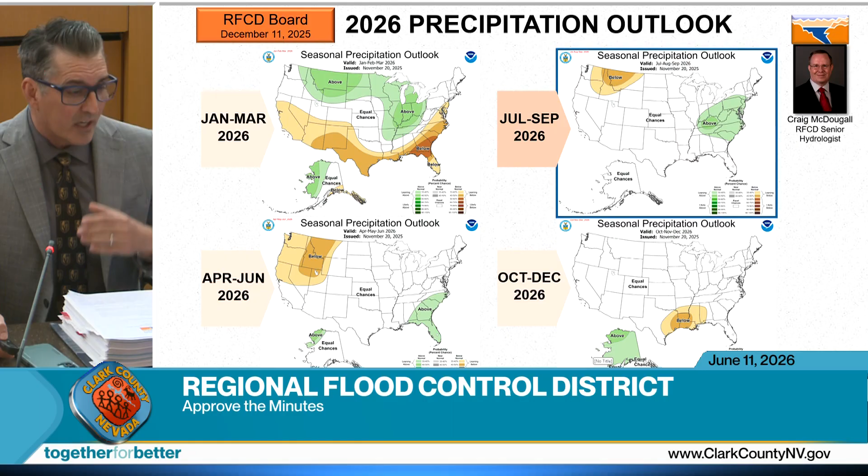But the updated forecast for this flash flood season looks like it's going to be wetter than drier. More above normal precipitation is expected. Pushing that out further, the August through October projection shows even more of southern Nevada likely wetter than normal. So we're looking forward to some rain this summer. Hopefully we don't get it all in one storm or one hour, but we could certainly use some rain.

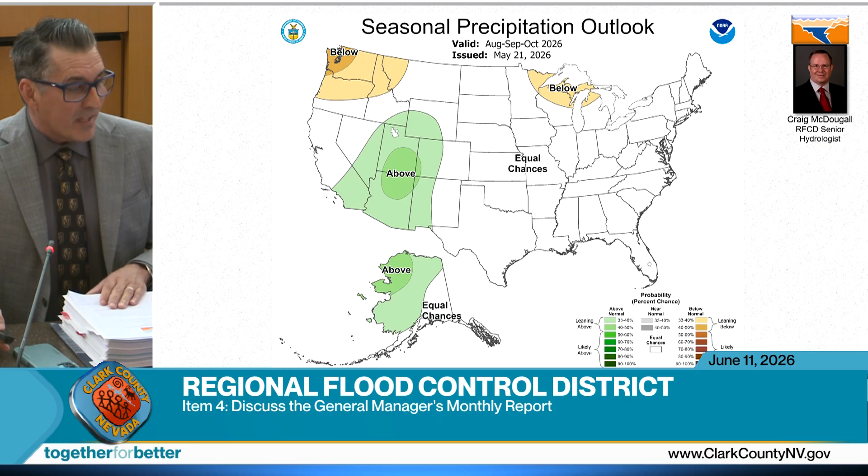Last but not least, I'd like to support the home team, say go Knights go, big game tonight. Hopefully they'll take care of business. With that, happy to answer any questions. Any comments or questions? Seeing none, we'll move on. Thank you, Mr. Trelease.

Part 2 of the agenda is the consent agenda. Items 5 through 22 are considered by the Regional Flood Control District to be routine and may be acted upon in one motion. Note that item 14 has been deleted from the agenda. I'll entertain a motion. Move to approve items 5 through 22. There's a motion on the floor. All those in favor? Aye. Any opposed? Motion carries.

Item number 23 is action to approve the master plan amendment for Avenue G storm drain, City of Boulder City. This is a public hearing. We do have a presentation provided for this project.

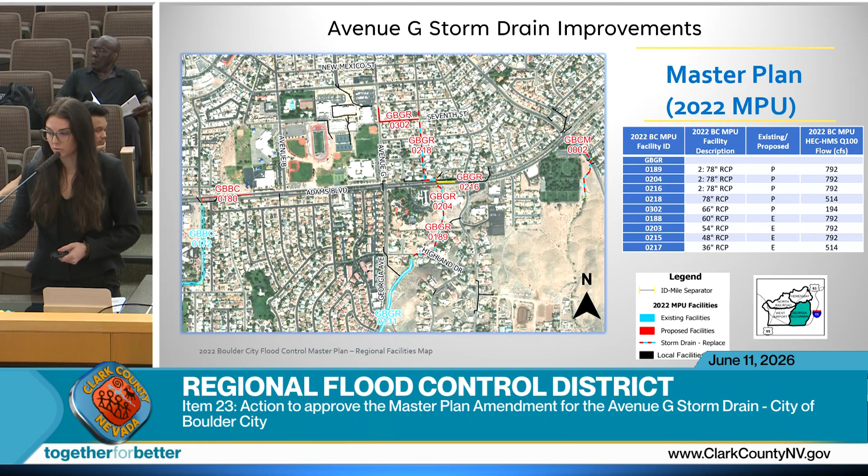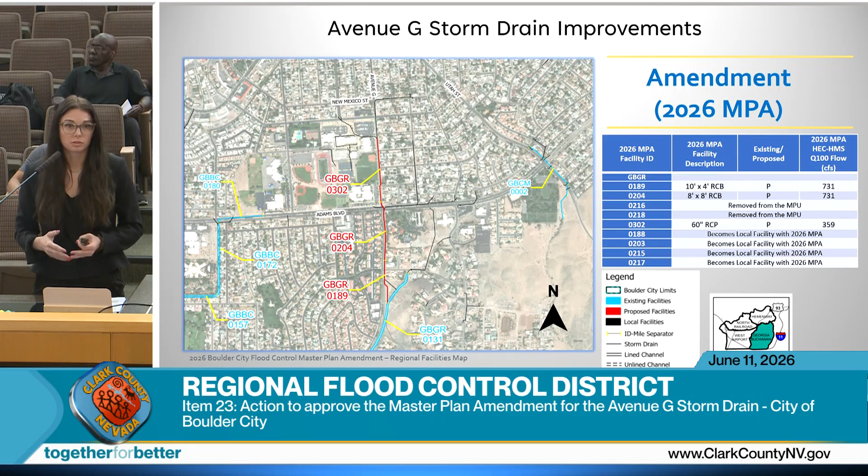The proposed alignment moved everything to Avenue G in front of Boulder City High School, and it was much cleaner in terms of construction clearances, and sizing as well was much better hydraulically.

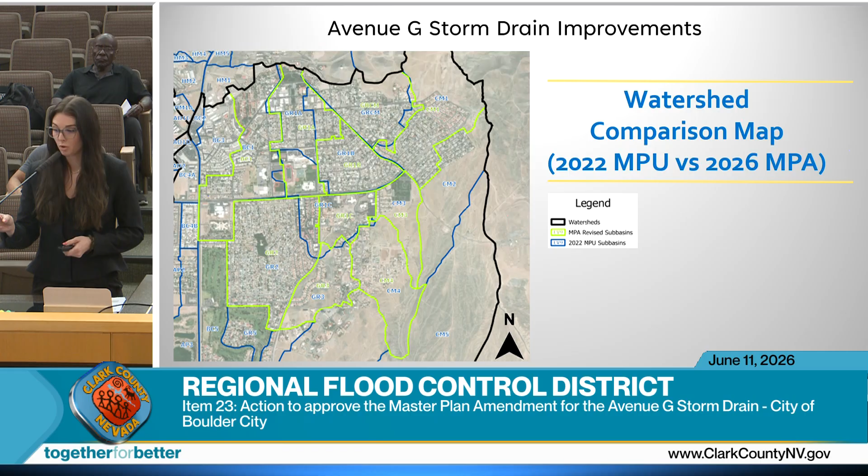The watershed as a whole did not change. Everything that was there before is still there now, but within some of the minor subbasins, it was refined for how the surface now flows, as well as how the storm drain flows.

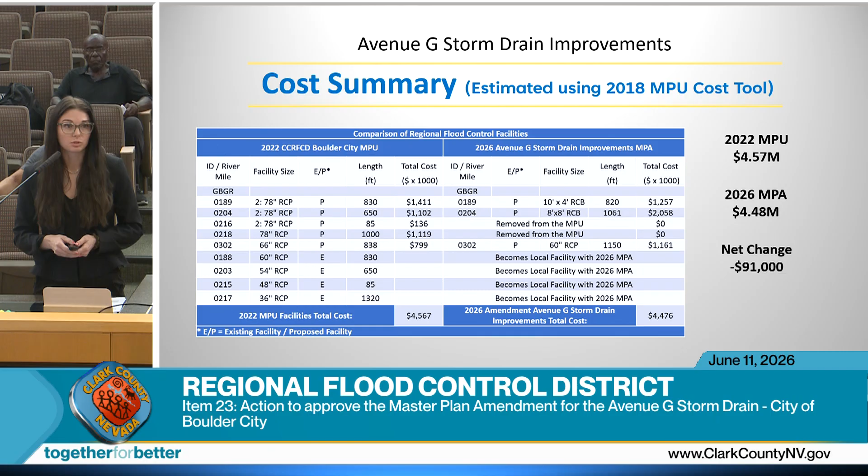The cost comparison between the 2022 MPU and the 2026 MPA is about a $91,000 decrease with the proposed alignment. With that, I hope you give us approval.

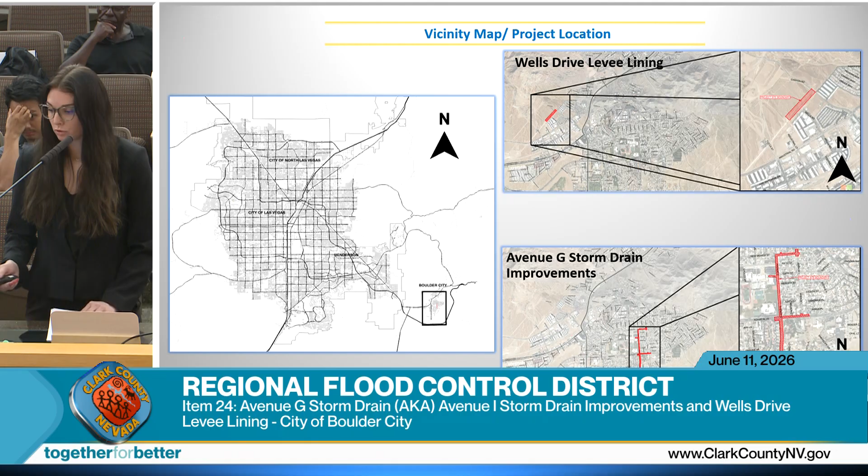The Avenue G storm drain runs from New Mexico south to the Georgia Channel. The storm drain alignment proposes about 1,150 feet of 60-inch RCP on the upstream end. It upsizes to an 8x8 RCB for about 1,000 feet, and then a 10x4 RCB on the downstream end.

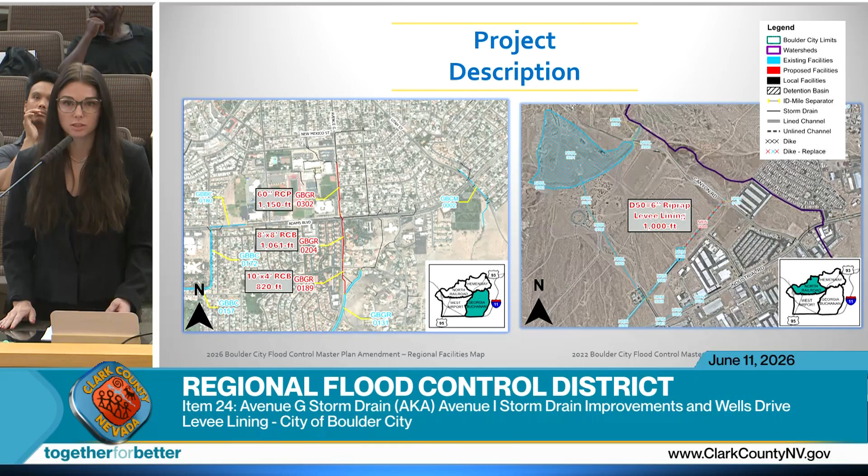The Wells levee lining is mainly just a rehabilitation. It proposes a little bit of earthworks as well as 6-inch riprap.

The typical section for the Georgia Avenue storm drain proposes asphalt replacement and a mill and overlay wherever it gets to the lane lines. Curb, gutter, median, sidewalk—any of that we are trying not to replace and keep our trenching widths as limited as possible, but there are locations where we do need to replace those.

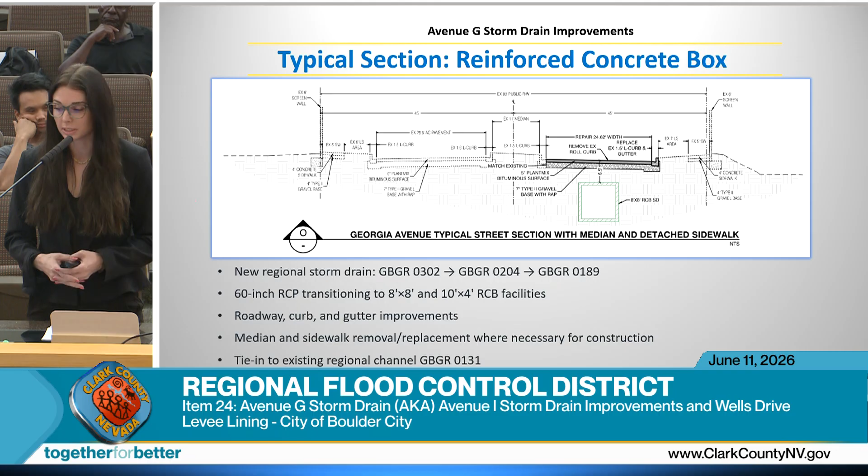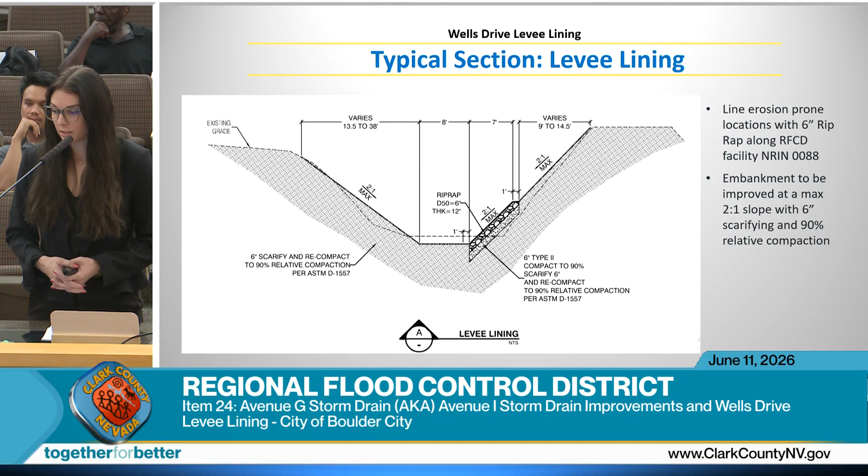The Wells levee lining section shows 6-inch riprap on the embankment, which protects against scouring and improves the lifetime of the levee. The embankment is also being regraded to achieve a 2-to-1 max slope, and the access road on top is being refined.

In terms of funding, the storm drain construction is the primary cost driver for the project. The levee work is very minor compared to the storm drain itself. Overall, the avenue facilities will cost about $14.7 million, and the Wells levee lining will cost about $412,000.

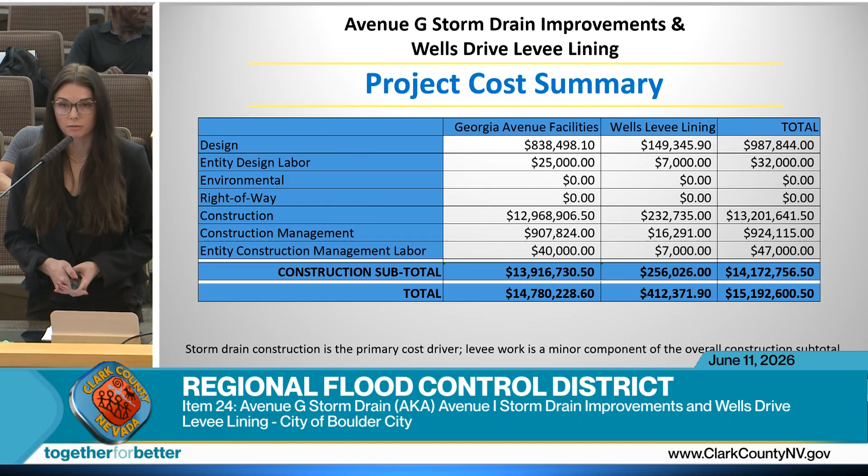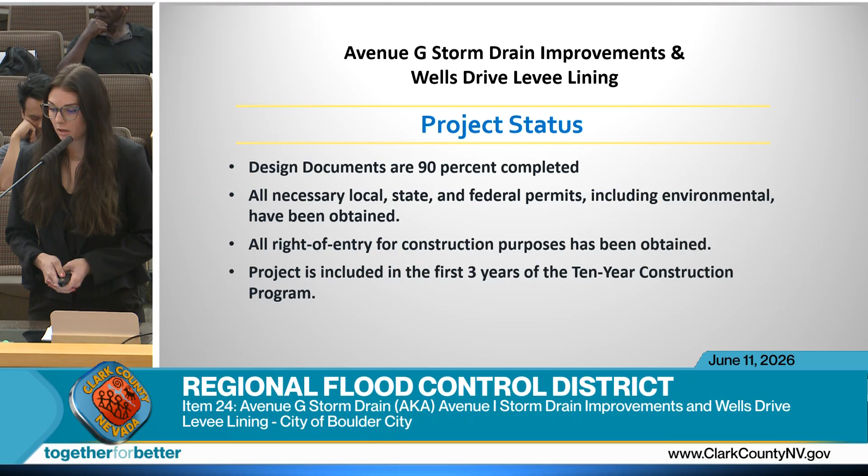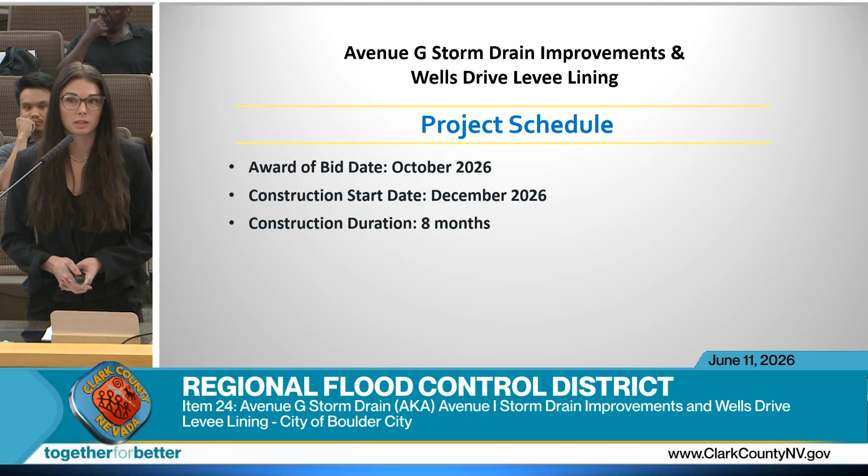The design documents are 90% complete, and we are about to submit our 100% next week. All the necessary local, state, and federal permits have been obtained, as well as the right-of-way. The project is included in the first 3 years of the 10-year construction program. We anticipate a bid date of October 2026, with construction starting the end of this year and extending for about 8 months to time out with Boulder City High School.

Thank you, Ms. Lawrence. Any comments or questions from the board? I will note that although there will be 2 contracts, the city of Boulder City does intend to bid this as one construction project.

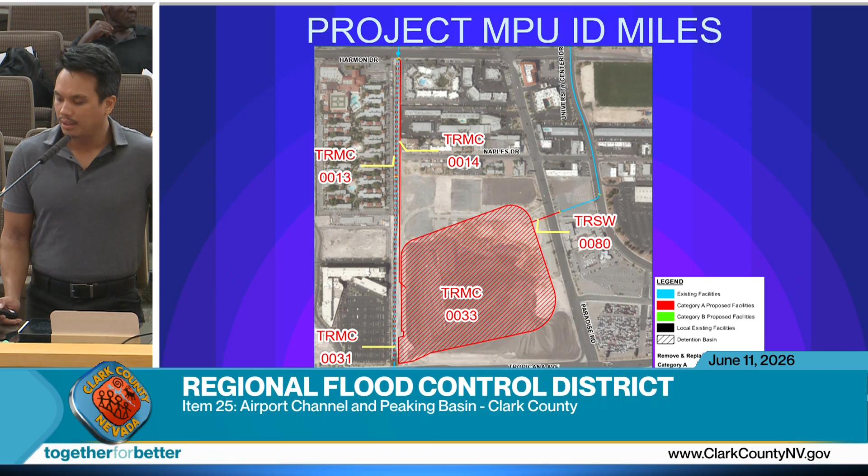The basin's main inlet is to the south off Tropicana through 5 10x4 RCBs. Flows enter an open rectangular channel and transition into a 15x5 RCB that connects into the existing dual 16x4 RCBs on Harmon. If the 15x5 RCBs overflow, there is a side weir at the rectangular channel that spills into the basin. The basin's main outlet is at the northeast through the 53x34 HERCP. There's a secondary outlet to the west through a 36-inch RCP that connects back at Harmon. If the basin overflows, the spillway is located to the east along Paradise.

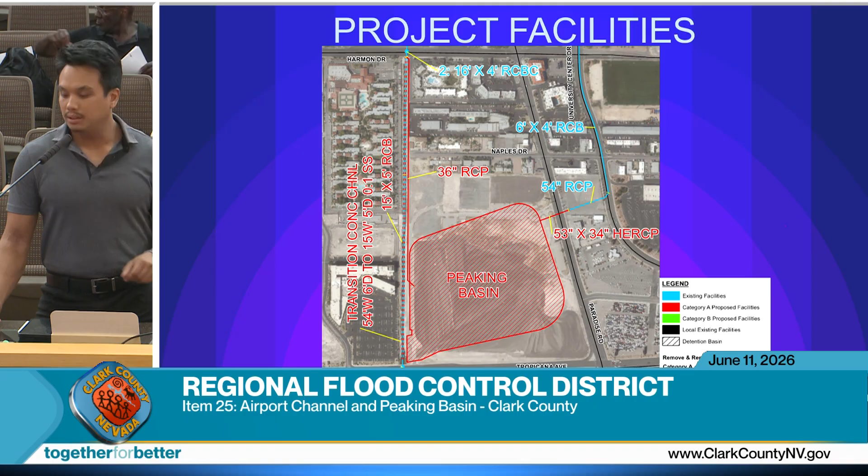Here are the project's main elements: the 15x5 RCB, the open rectangular channel, and the basin's spillway.

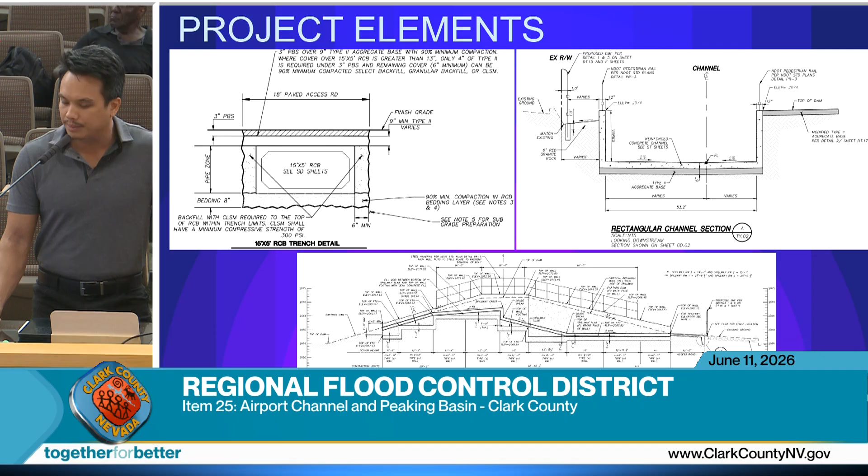Design is expected to be close to $2 million. The construction is close to $28 million, giving us a total of about $29 million.

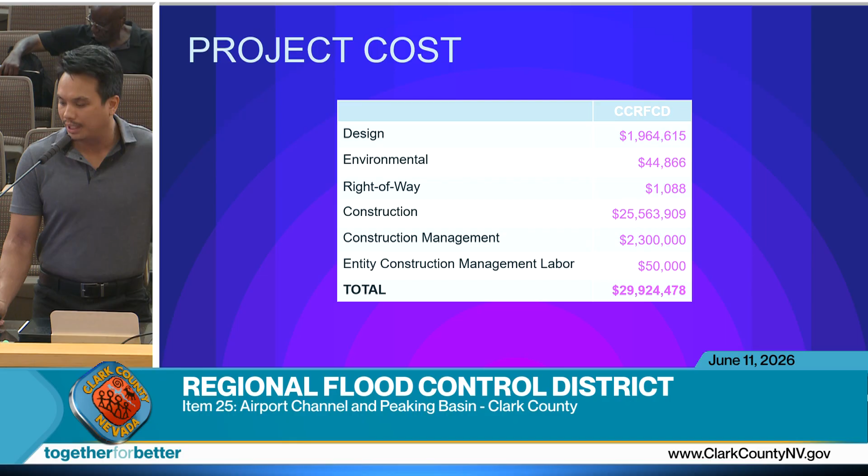All design documents are beyond 90% complete. We've obtained all the necessary right-of-way and easements, and all local, state, and federal permits, including environmental, have been obtained. Construction start is expected to be January 2027, and the project duration is expected to be 12 months.

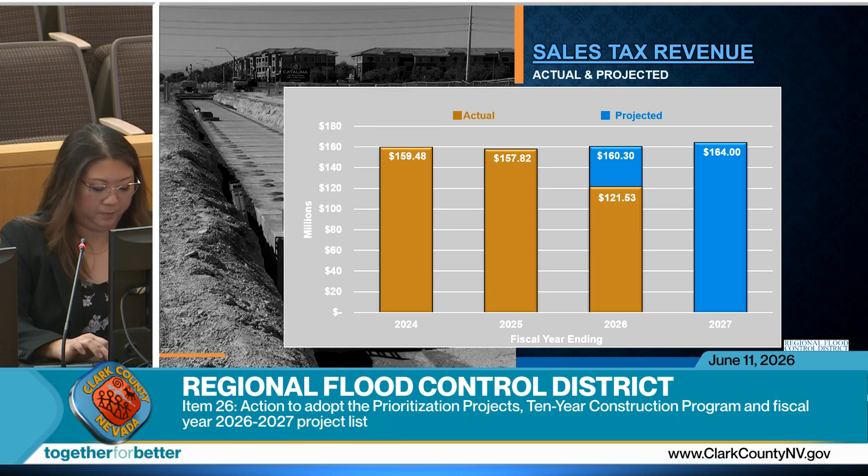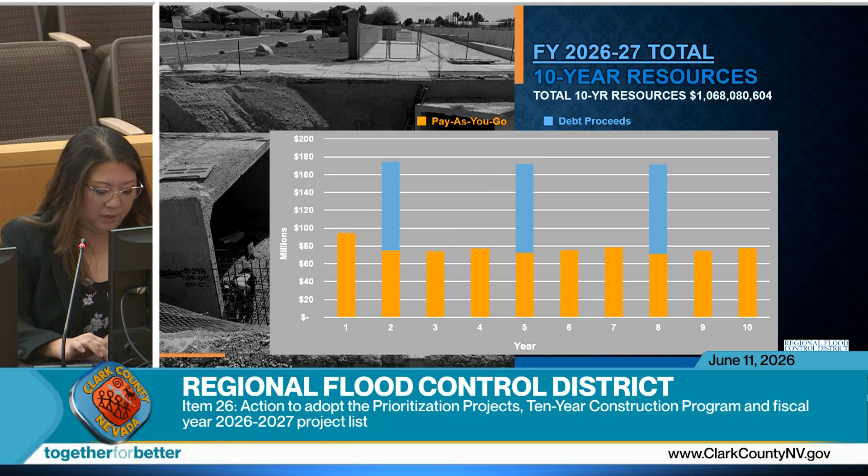The total estimated resources for the 10-year period include pay-as-you-go funding and debt proceeds. The orange bars represent pay-as-you-go funding, which are resources available after outstanding obligations have been met. These funds are transferred into the capital improvement program. The blue bars represent anticipated bond proceeds of $100 million in each of years 2, 5, and 8. These estimates were used to program projects in the 10-year construction program. The total resources, including bonding and pay-as-you-go funds, is approximately $1.1 billion.

Each entity receives a prorated share of funds to program projects against. The percentages are calculated based on the dollar amount of the remaining facilities to be built in each planning area compared to the total dollar amount of all remaining facilities to be built in the flood control master plan. The percentages are updated every 5 years with the Las Vegas Valley master plan update, and the next update is scheduled for 2028.

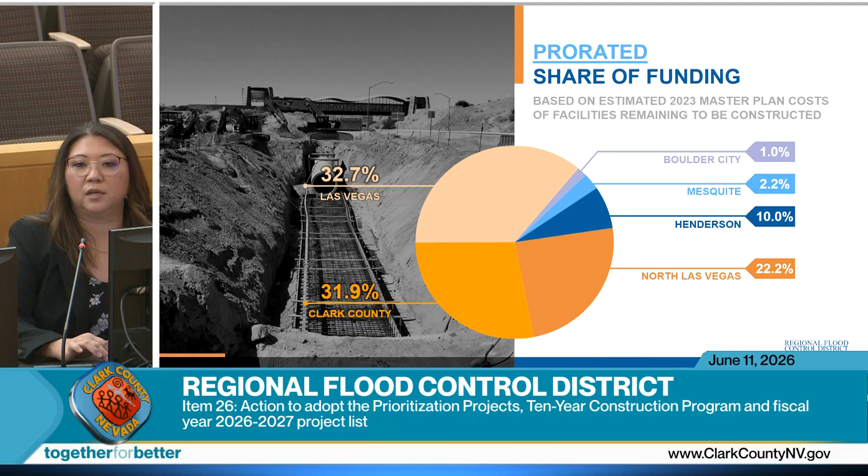The following slides will highlight construction projects that are first-year eligible, which means they have construction costs programmed in the first 3 years of the 10-year plan. This project list serves as the capital improvement program for fiscal year 2026 to 2027.

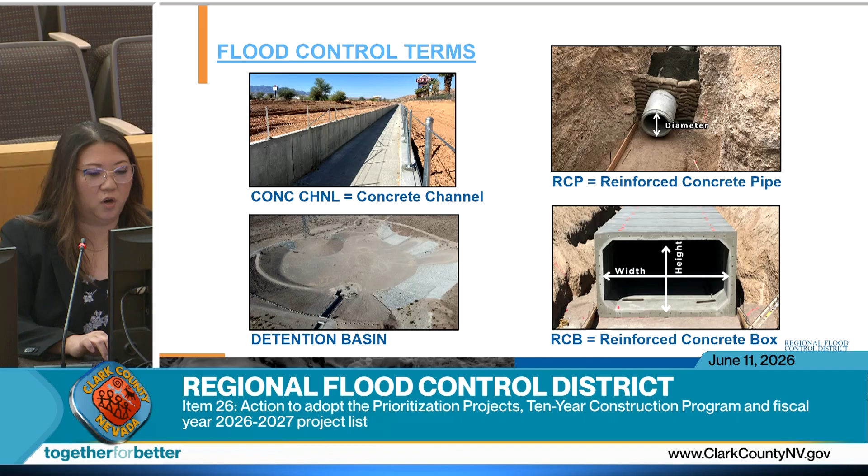For reference, these are the main types of flood control facilities constructed with district funds, and that includes concrete channels and detention basins shown on the left side of the screen, and reinforced concrete pipe, or RCP, and reinforced concrete box, or RCB, shown on the right side of the screen.

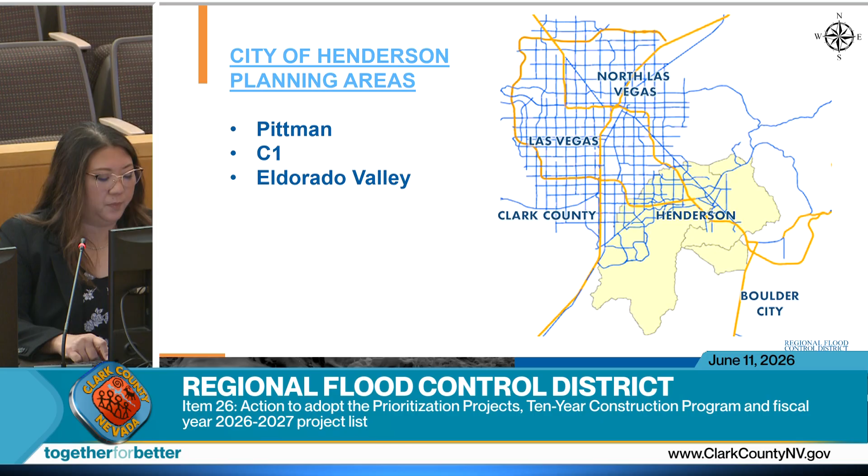The City of Henderson manages 3 planning areas, which are the Pittman, C1, and Eldorado Valley planning areas. This map shows the Pittman planning area. The blue lines represent existing facilities, the red lines represent proposed facilities on the 10-year plan, and green lines represent facilities beyond the 10-year plan. First-year eligible construction projects will be indicated with the red oval.

There are 2 construction projects that are first-year eligible in the Pittman planning area. The Southeast Pittman Detention Basin is located near the southwest corner of Via Nobila and Via Central, and includes a detention basin, spillway, and outlet pipe.

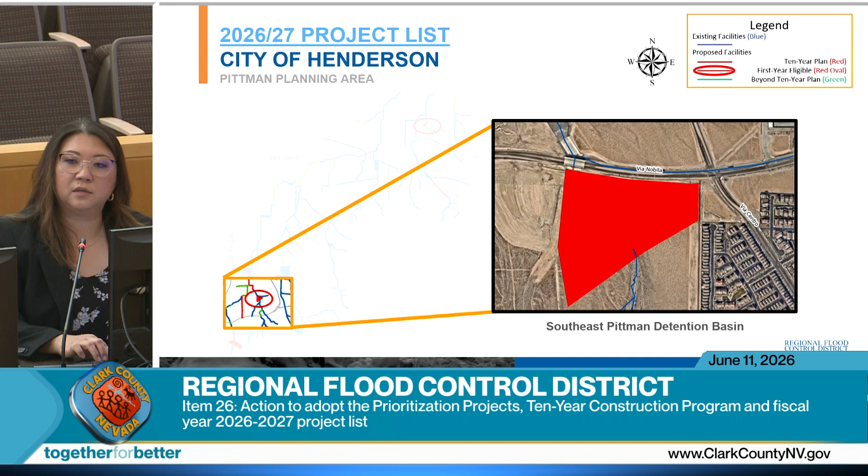Next, we have the Pittman Sunset Burns to Foster Phase 1 project, which consists of concrete box storm drain in Sunset Road and Merlayne Drive, then extends south to Foster Street.

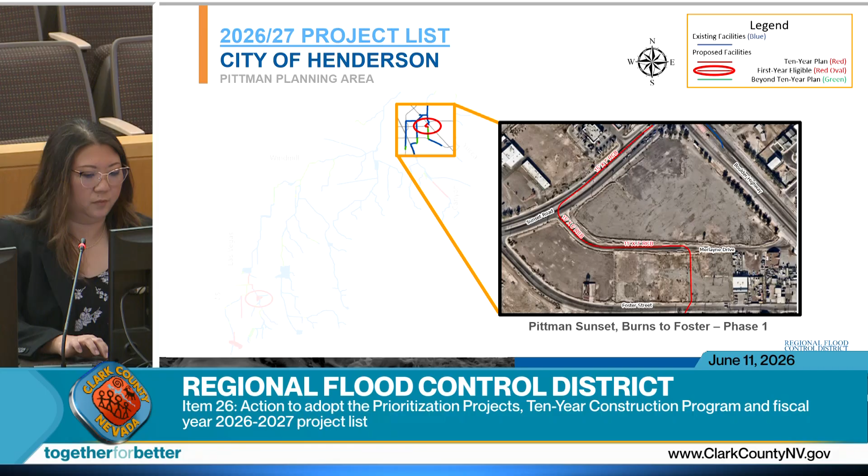In the C1 planning area, there is 1 construction project that is first-year eligible, and that is the Cadiz Storm Drain Project. This project consists of concrete pipe in Cadiz Avenue extending west from Racetrack Road to Pueblo Boulevard, where it connects to the existing C1 channel.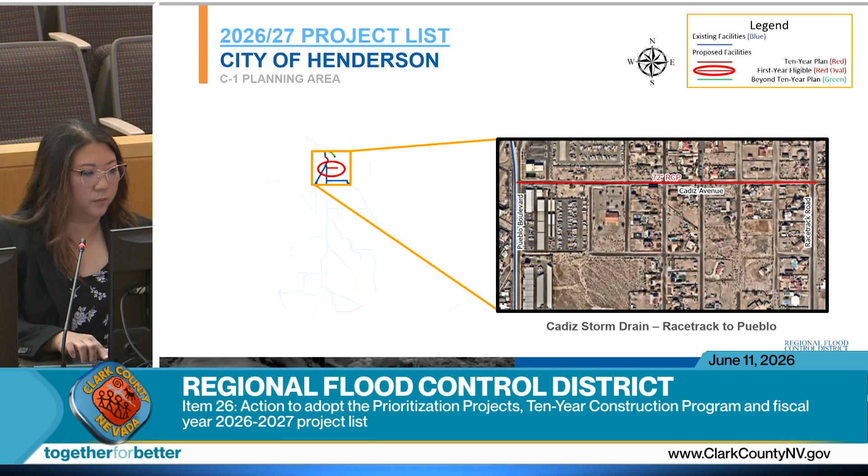The City of Henderson has 3 construction projects that are first-year eligible, totaling about $46 million, and they have a 10-year plan total of about $104 million.

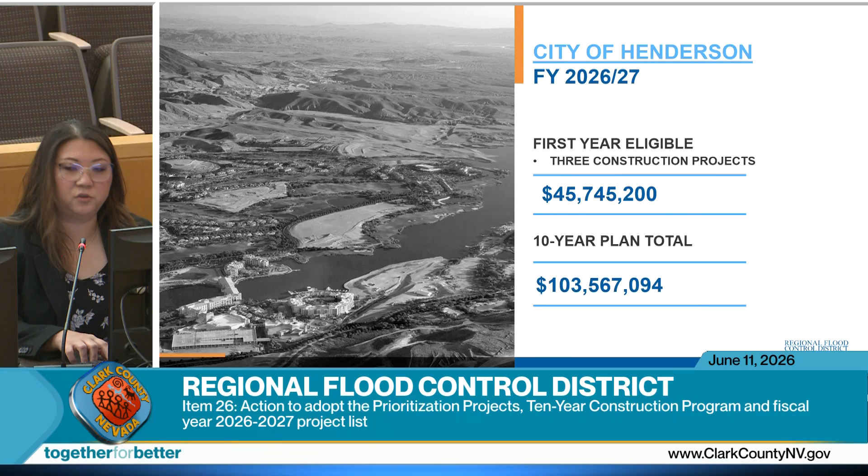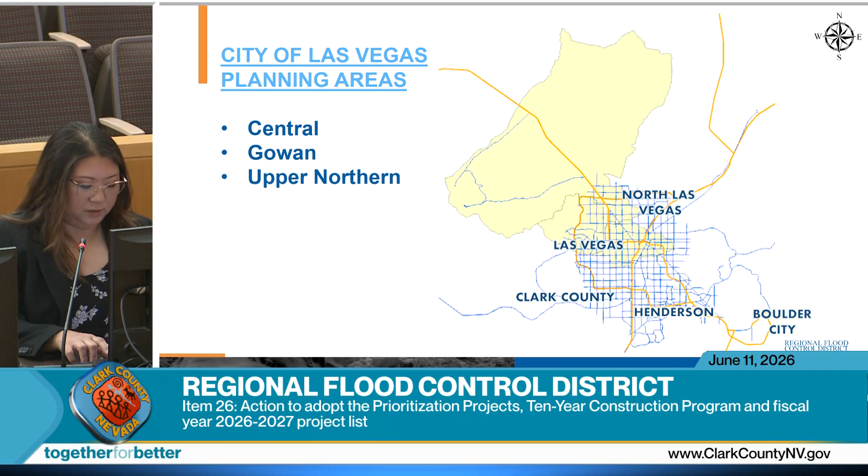The City of Las Vegas manages the Central, Gowan, and Upper Northern planning areas. Starting with the Central planning area, there are 2 construction projects that are first-year eligible.

The Lake Mead Carey Detention Basin outfall includes construction of a concrete outlet pipe at the northeast corner of the basin that will connect to existing storm drain in Carey Avenue. A water quality structure will also be constructed as part of the project, which is being managed by the City of North Las Vegas.

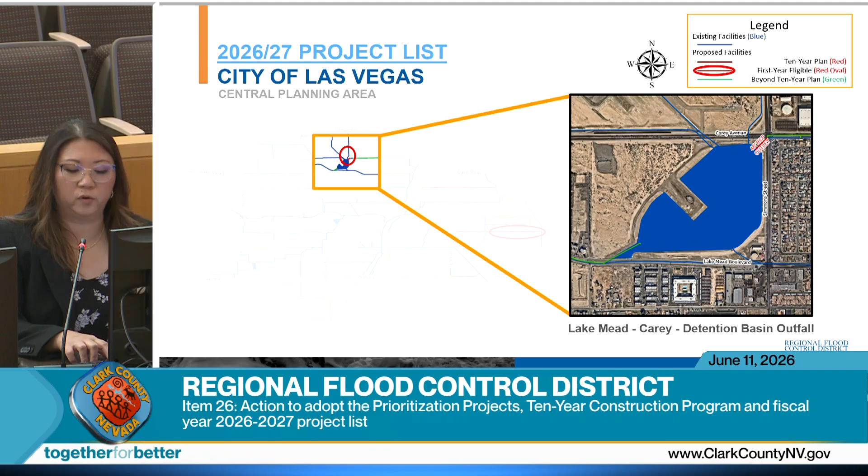Here we have the Las Vegas Wash Stewart Avenue Storm Drain Project, which includes concrete box storm drain in Stewart Avenue from the Las Vegas Wash, shown on the right side of the map, extending west to Sandhill Road.

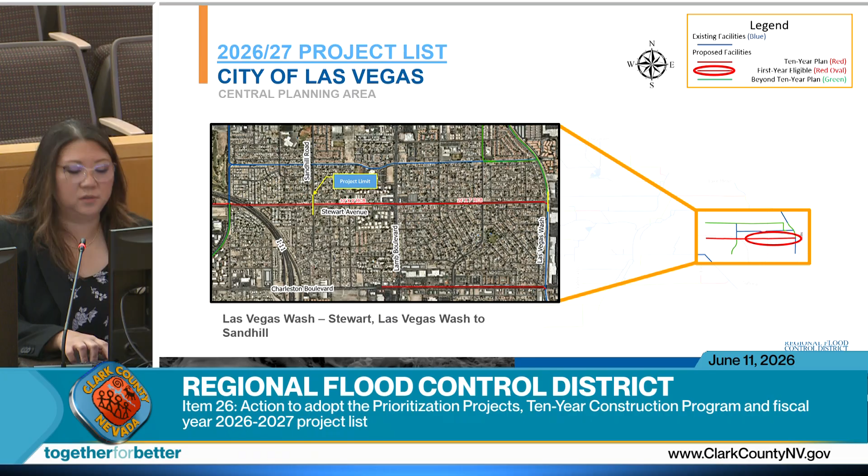This is the Gowan planning area. There is 1 construction project that is first-year eligible. The Gowan-Alexander Decatur to Torrey Pines project includes concrete box storm drain in Alexander Road between Decatur Boulevard and Torrey Pines Drive.

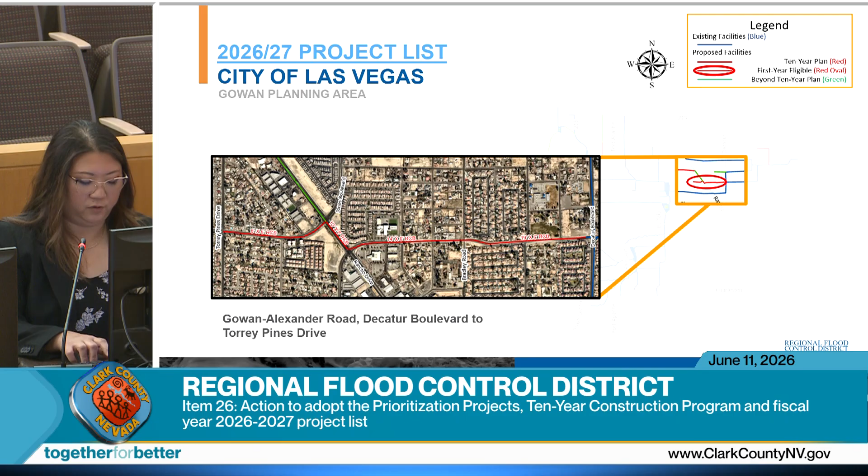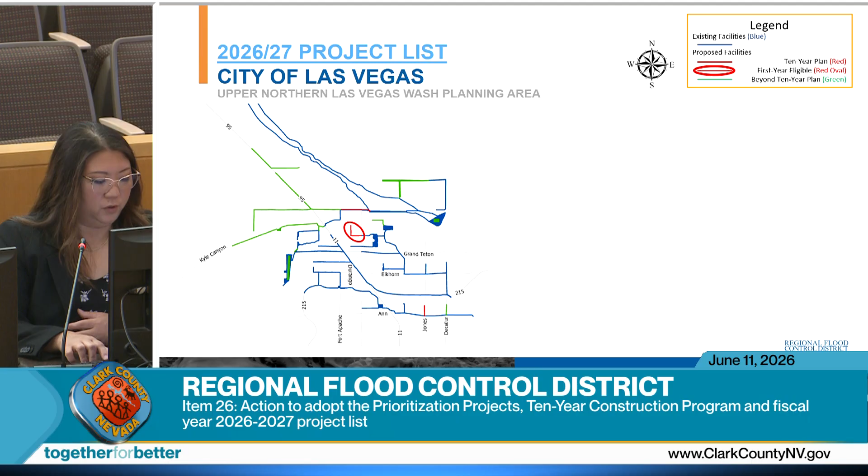And in the Upper Northern Las Vegas Wash planning area, there is also 1 construction project that is first-year eligible. The Brent drainage system includes concrete box storm drain in Brent Lane and El Capitan Way between Durango Drive and O'Hare Road.

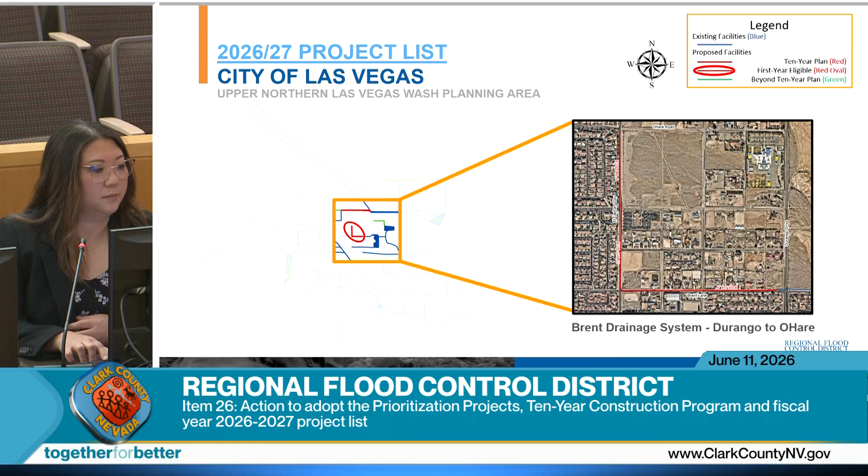The City of Las Vegas has 4 construction projects that are first-year eligible, and they also have 2 design projects that are first-year eligible, with a total of about $135 million. Their 10-year plan total is about $371 million.

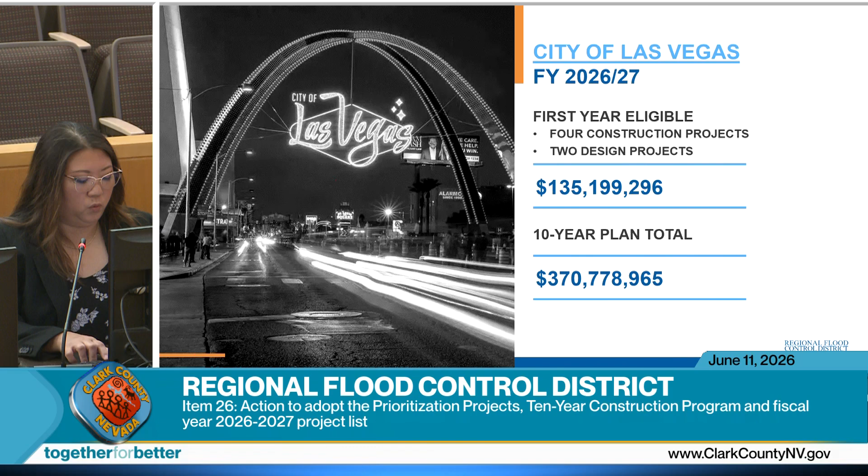Moving to the City of North Las Vegas, they manage the Lower Northern, Range Wash, and Apex planning areas. In the Lower Northern planning area, there are 2 construction projects that are first-year eligible.

The first is the North Las Vegas Detention Basin upgrade, which includes expansion to the existing basin, a new spillway, and upgraded inflow and outflow facilities. The project is located north of the 215 Beltway between North 5th Street and Losee Road.

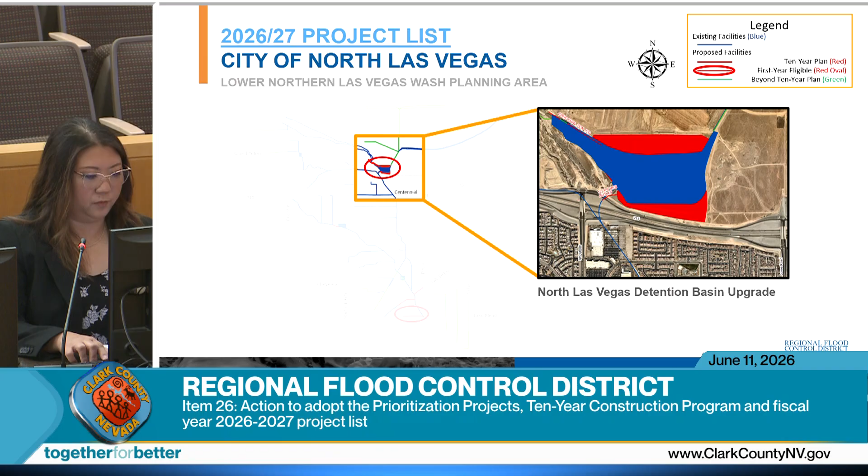To the south, we have the Lake Mead Storm Drain Project, which includes concrete box storm drain in Lake Mead Boulevard from the Las Vegas Wash to Civic Center Drive. This project will be built in conjunction with roadway and utility improvements in Lake Mead Boulevard.

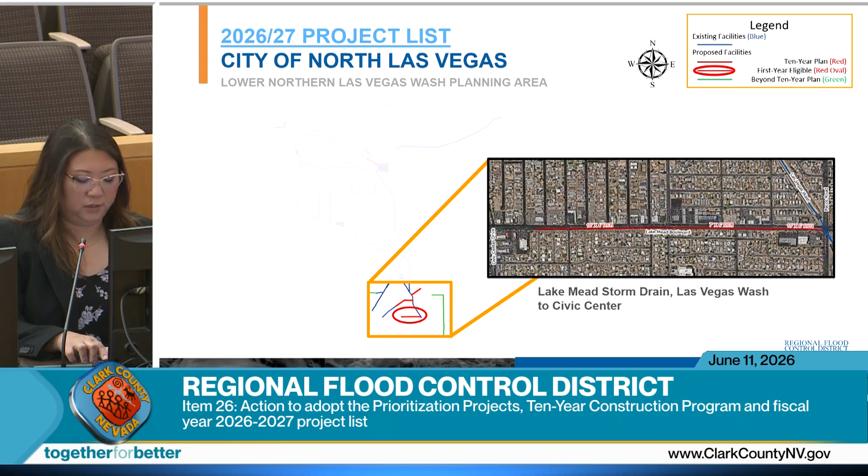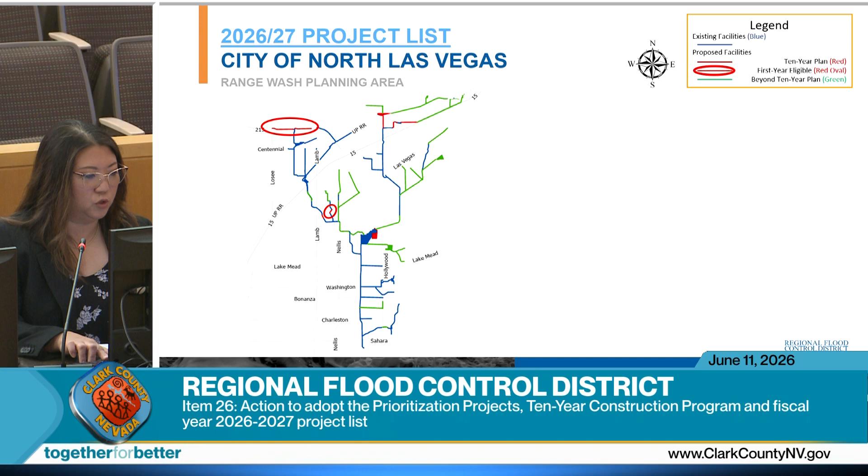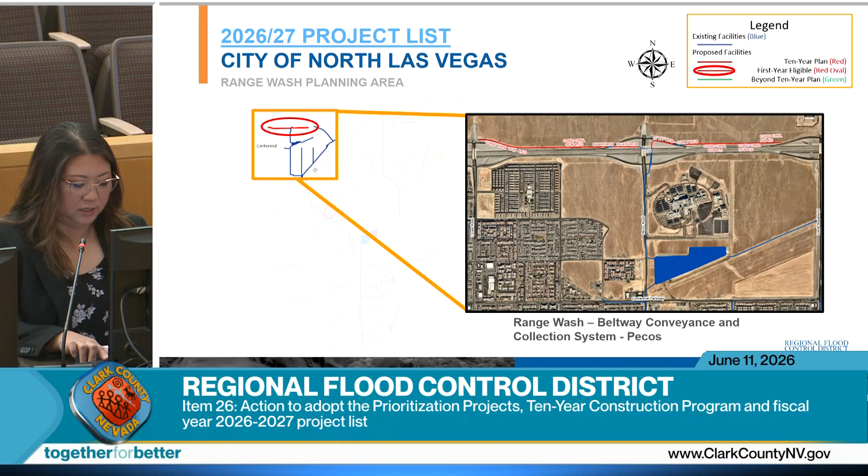In the Range Wash planning area, there are 2 construction projects that are first-year eligible. This is the Range Wash Beltway Conveyance and Collection System at Pecos. This project includes concrete channels and box storm drain along the 215 Beltway between Losee Road and Lamb Boulevard. These facilities connect to existing storm drain in Pecos Road.

Here we have the Sloan Channel East Branch project, which includes a coordinated concrete channel across private land that will connect to existing storm drain in Las Vegas Boulevard and Valmark Drive. Clark County is managing this project.

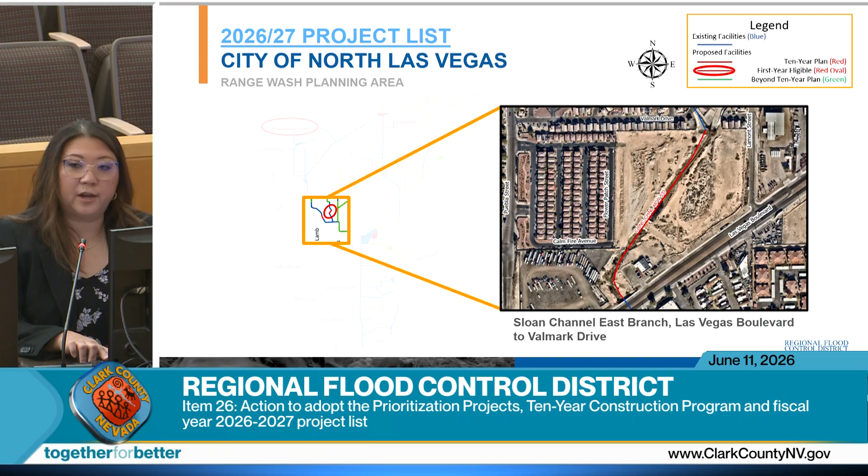The City of North Las Vegas has 4 construction projects that are first-year eligible, and they have 1 right-of-way project that is first-year eligible, totaling about $129 million. Their 10-year plan total is about $293 million.

In Clark County, they manage the Tropicana Flamingo, Duck Creek Blue Diamond, and Clark County outlying planning areas. Starting with Tropicana Flamingo, there are 3 construction projects that are first-year eligible.

The Flamingo Wash UPRR to Hotel Rio Drive consists of rock-lined channel improvements in the Flamingo Wash between the Union Pacific Railroad and Hotel Rio Drive.

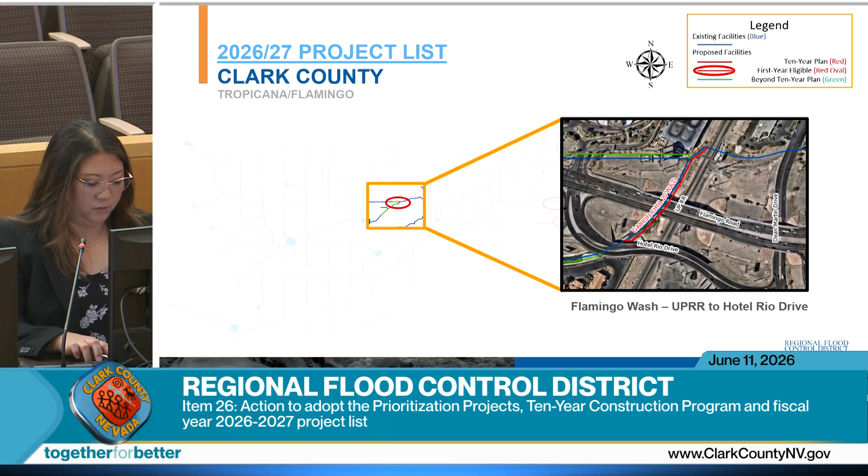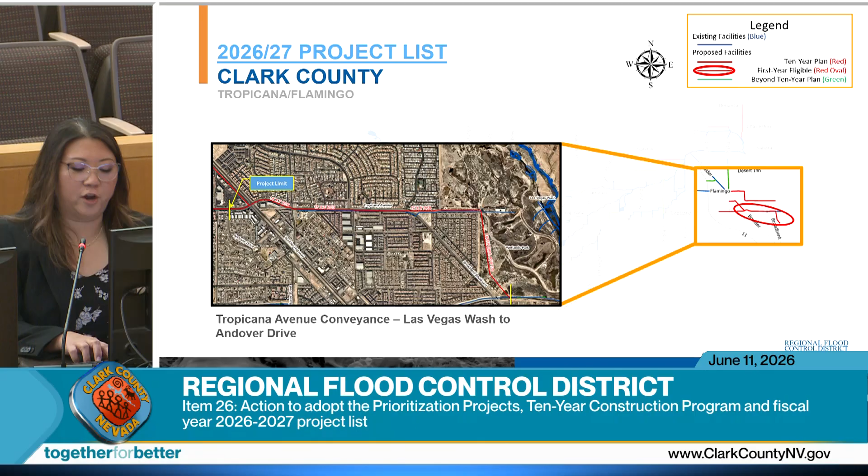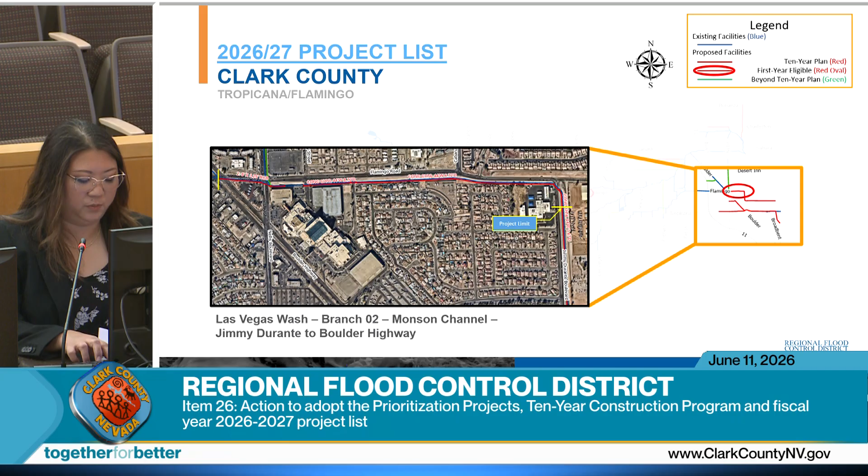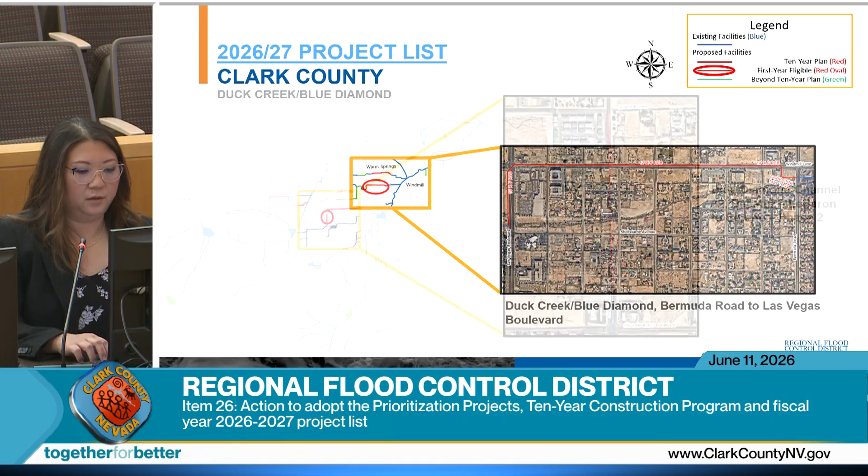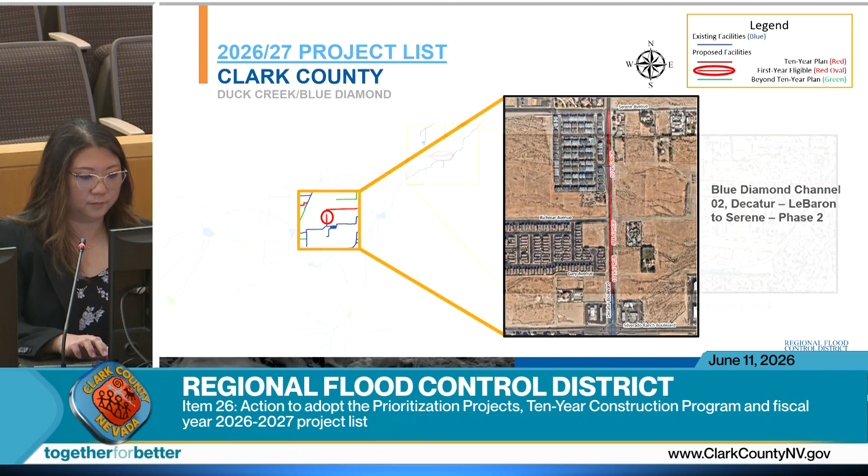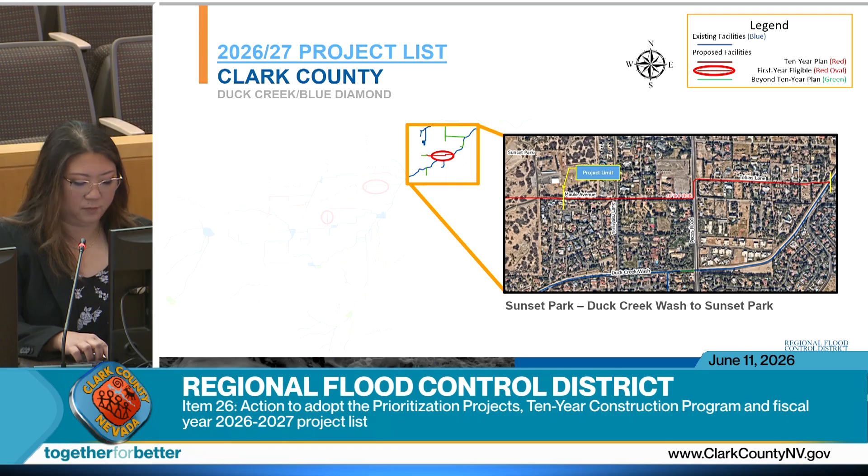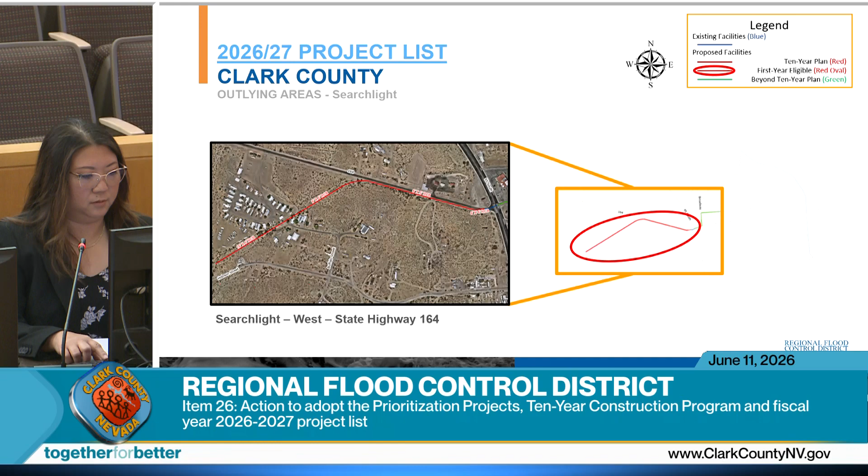Clark County has 7 construction projects that are first-year eligible, and they also have 4 design projects that are first-year eligible with a total of about $143 million. Their 10-year plan total is about $405 million.

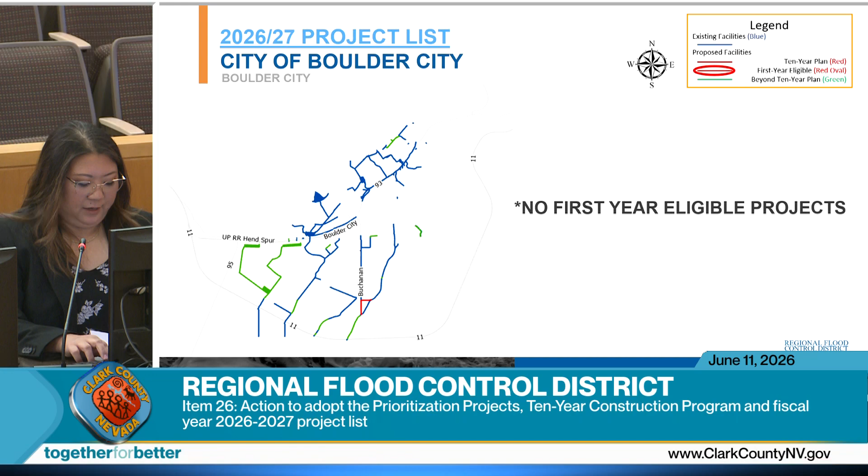Moving to Boulder City, there are no first-year eligible projects. However, as presented earlier in this meeting, funding was requested for 2 Boulder City projects for this fiscal year, with construction anticipated later in 2026. Boulder City has a 10-year plan total of about $3 million.

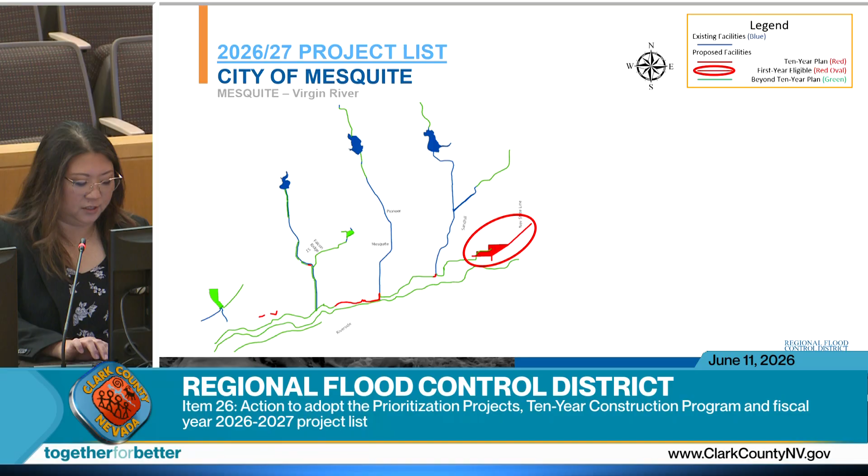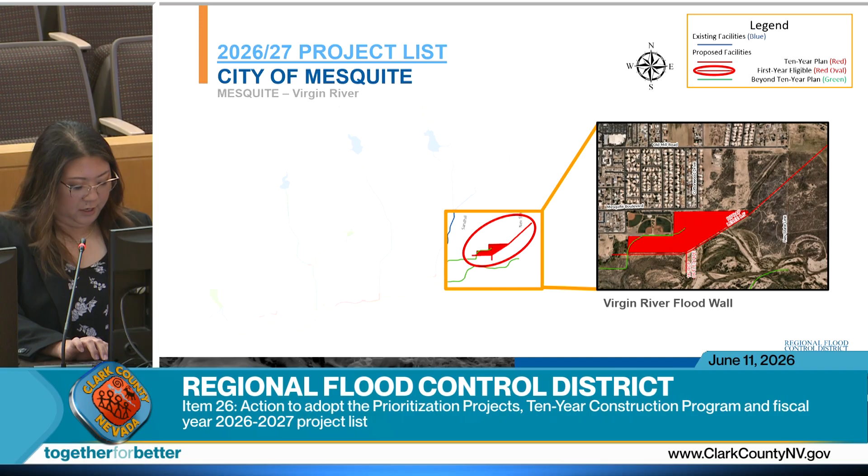In the city of Mesquite, there is 1 construction project that is first-year eligible: the Virgin River Flood Wall Project. This project includes construction of a levee along the Virgin River extending east into the state of Arizona. The levee will provide flood protection for the community along the river. A detention basin is required as part of the project to collect storm drain flows and discharge it to the river. This first-year eligible construction project totals about $24 million, and the city has a 10-year plan total of about $37 million.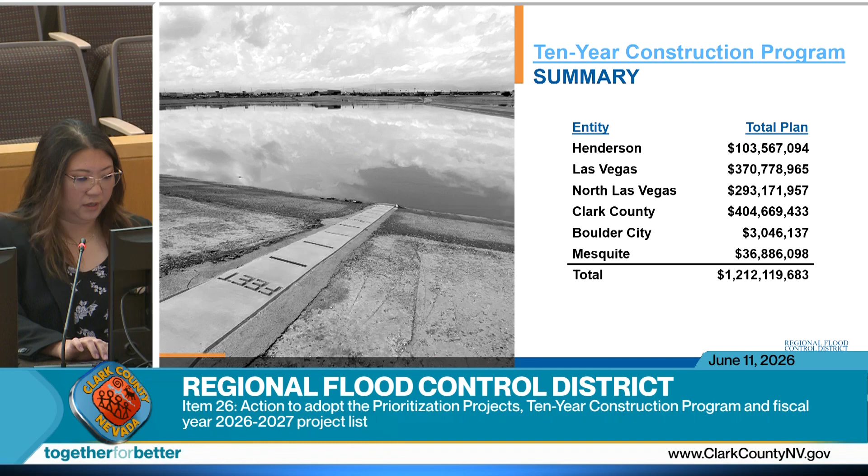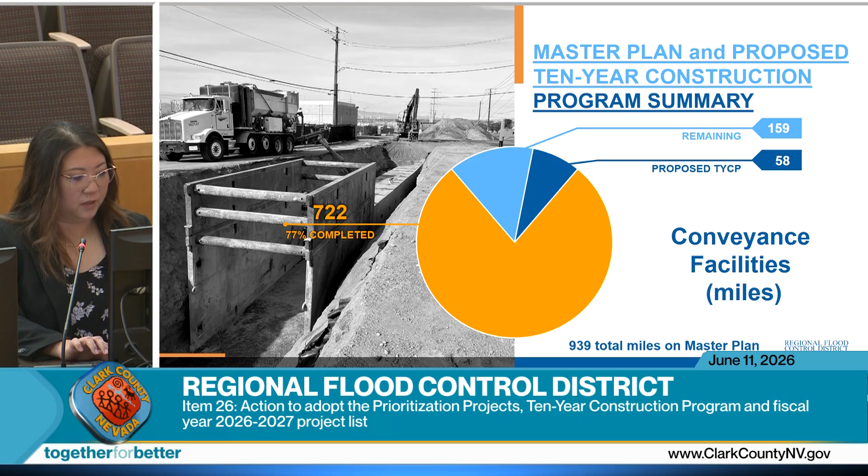The status of the district's flood control master plan is that 722 miles of channels and storm drain are complete, which is about 77% of the total miles on the master plan. 58 miles are proposed on the 10-year plan, and 159 miles remain beyond the plan. 113 detention basins are complete, which is about 75% of the total number of basins on the master plan. 6 basins are programmed in the 10-year plan, and 31 basins remain beyond the plan.

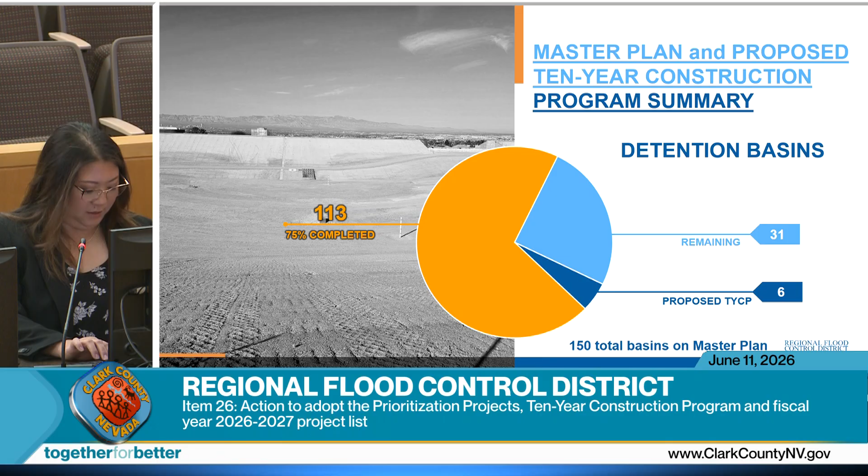That concludes the presentation. Thank you.